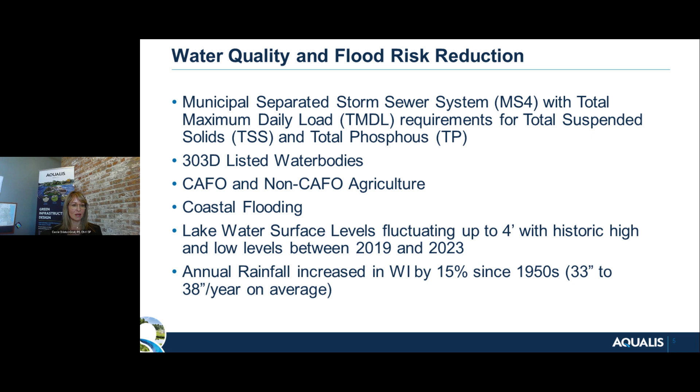And then also annual rainfall increasing in Wisconsin, as it is in various places throughout this country and the world, really changing, pointing fingers at climate change or at just changing weather patterns, somewhere between 33 to now 38 inches per year on average. So a lot of communities are saying, maybe we should think about green infrastructure.

We heard today from Lisa Haney starting off, and how we did a really good job thinking about point sources for sanitary outfalls and for point sources that were coming right off of industry in the old days, and where stormwater is now the #1 reason for pollution in our water bodies. We need to do more with source control, and that's really what green infrastructure is. We describe that as managing water where it falls. Grab it as close to the source and do something that holds it, allows infiltration, allows settling of pollutants, and maybe it's going to be a temporary holding place until that storm has passed, but it's a way to consider multiple areas of storage throughout your watershed.

We also heard quite a lot from Matt Prusko, and I really appreciated all of his design insights. We've seen so many of the same things. We've been designing green infrastructure for about 20 years, and in Wisconsin, and you can hear my accent, you'd think, northern climate and frozen conditions and those things all don't seem to be really great matches with green infrastructure, but we've worked through all that, and we've got a lot of very similar lessons that we've learned from that.

But he talked about managing a lot of smaller storms, because it's the most often storms you're going to be seeing, so the 1 to 2 inch storms, or even less than 1 inch storms. And I want to address that a little bit too, and some of the things that we've talked about with this project and where we maybe changed that just a bit. He added some awesome examples of bringing agencies together and various communities and groups and people to have great things happen within your watershed. And I think all of that is key.

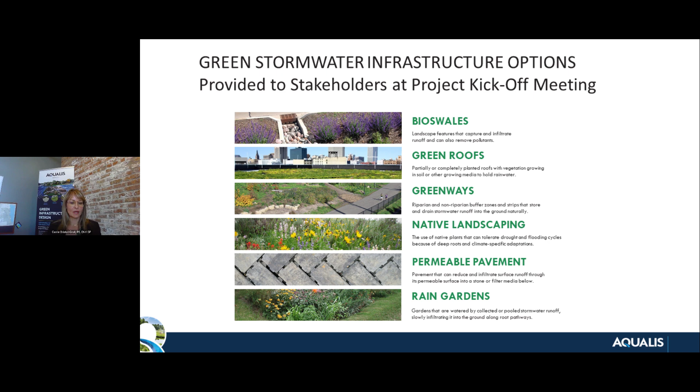And what they came up with was this list on this page here: bioswales or bioretention, green roofs, greenways, which is tying together a variety of green aspects, maybe within a corridor of a park, native landscaping, permeable pavement, rain gardens, rainwater catchment, which would be rain barrel, cistern, storm garden, anything that catches and holds. Underground storage, even, they consider to be green infrastructure. That's something that can be controversial.

If it is a big structure that goes underground, it doesn't necessarily look green, but why they consider it to be green infrastructure is because, again, it holds storage close to the source. It manages water in small catchments throughout your watershed and allows for settling of pollutants and also not flooding, potentially not overwhelming a sanitary system if there were possibility of inflow and infiltration happening. We also included removal of pavement and structures as a green infrastructure practice.

You don't get as much credit or as many gallons of storage out of this activity, but if you have giant parking lots for big malls that maybe are not being utilized very often, removing that pavement, removing an old building from the back 40 of a school property or something is also considered green infrastructure in this community.

Adding soil amendments. We've heard a lot lately about urban soil health, about soil amendments being added and different treatments to be utilized with urban soils. So soil amendments is a very important part of that. These are alphabetically listed, not in order of importance. So, trees also, any type of tree can be added and has some various types of contributions to water quality and all the other co-benefits for air quality and habitat and all these things.

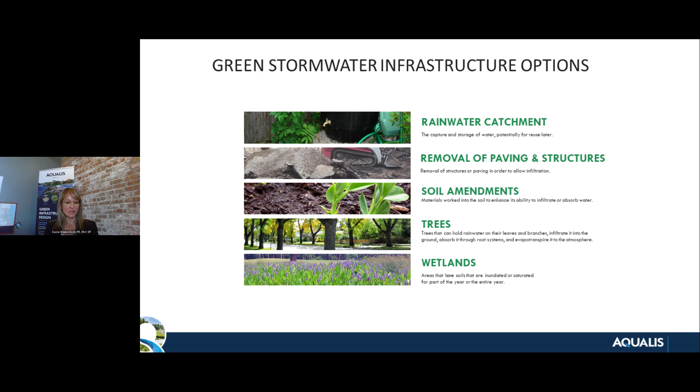So next part of our workshop, and we started with a few surveys to all of those participants, is to get a feel for where they are in terms of if you are going to do green stormwater infrastructure or green infrastructure, where do you want to place it? And then what is the need for having it? So it was two different surveys. One is about what is the need for it, and the other is where would you place it?

And so when we go through the conversation at our workshop, we talk about, do you want to have green infrastructure only at an outfall of a storm sewer? It's probably not effective there, but some people thought in the beginning, and that's the part that really varied the most with the survey, a lot of people thought, oh, sure, the water comes down the pipe or down the street, we're going to throw it into porous pavement or a bioswale, and then it will just discharge out to the waterway. And they found out through our conversation that really is not that effective and may be okay for the water body itself, but it doesn't meet a bunch of our other objectives that we'll get to in a minute here.

Where do we also want to think about placing it, near schools where there's an educational opportunity, only in public rights of way, only on parks and playgrounds? So a variety of locations for where you would want to place it, but then where is the need? And as we had our conversation, it became clear that the highest needs are where there is flood potential or ponding in a roadway. Usually we're not going to be looking at managing coastal flooding. That's just too big a beast with too many potentials for not really managing that well.

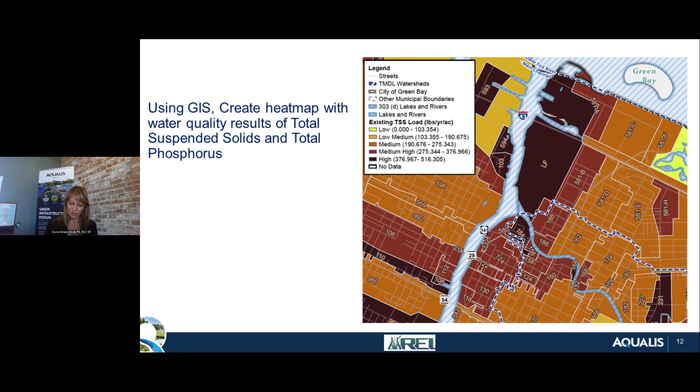Sometimes those evaluations have been done already as a part of your MS4 permit, and sometimes they're not. So on occasion, then we'll have to do all the calculating to come up with that water quality. Those are mapped. Next, we do take that same map and then we lay those neighborhoods over. So each neighborhood is delineated and it's got an identifier.

And the city was curious if they did have that revolving loan fund going out to the community for a rain garden in a residential property, we want to give them a little extra bonus points to their application if they happen to be located in a neighborhood that has poor water quality or that has maybe reduced property values. We also looked at that in the community, hoping we could improve property value by way of more green in that community. So to be able to map where they are, we wanted to have the neighborhood shown.

And then historic ponding, I'm going to say more so than flooding. We're not looking at coastal flooding. We're not looking at FIS maps. We're looking at areas within the system where it's usually a low point mid-block or a storm sewer's undersized. You know, storm sewers are only designed for maybe a 10-year storm 50 years ago. Now that 10-year storm is more like the 5 to 7-year storm today. And so occasionally you're going to see ponding, flooding, water overtopping the roadway into private property.

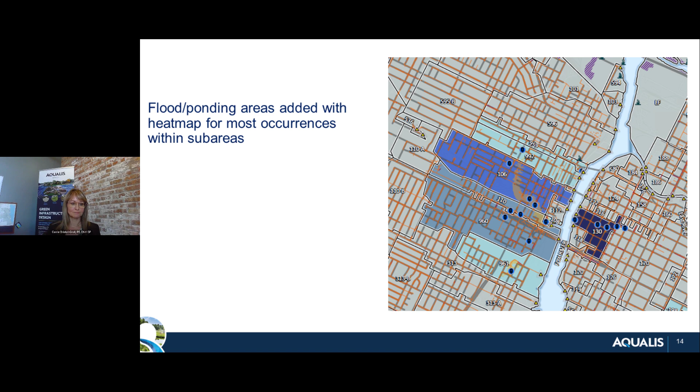And wherever that happens, they usually get a phone call during a rain event to the police or fire department, and they map these. So they've kept track of all those phone calls they've received. We mapped those and we said, in the areas where the blue dots are, is where you're usually getting the phone calls, which sub-watersheds are those in? Then we're able to lay those into the map as well. So you see where I'm going. We're mapping, we're mapping, we're mapping. We bring all those maps together and it's kind of like making a batch of cookies to see what are we going to get out of it.

We're also looking at the city's capital improvement program. So what are the projects that they are going to have on their books for the next 5 years? I think it was a 5-year plan. And let's lay them out. So every location where you see a yellow dot, it's a programmed project. And we're mostly looking at something like a water main, a sewer project, a roadway replacement, something that's definitely in the roadway right of way.

I don't believe I have a map on this last bit here, but then we're going to look at constraints. So, well, a positive opportunity or constraint. So an opportunity would be parcels that are in lower than average property value neighborhoods. These are areas that have declined. Maybe they have some amount of vacancies in properties or abandoned buildings that need to be renovated or that need some kind of facelift. We want to try to bring any public dollars we can to bring more life back into these neighborhoods. So we have those mapped.

Anything that we have as proposed development areas, we know there's a lot of old infrastructure in Green Bay. It's a very old city. And so there's some old industry buildings or old commercial buildings that have been sitting vacant that are getting fresh and ready for some kind of renovation. Those are mapped as well.

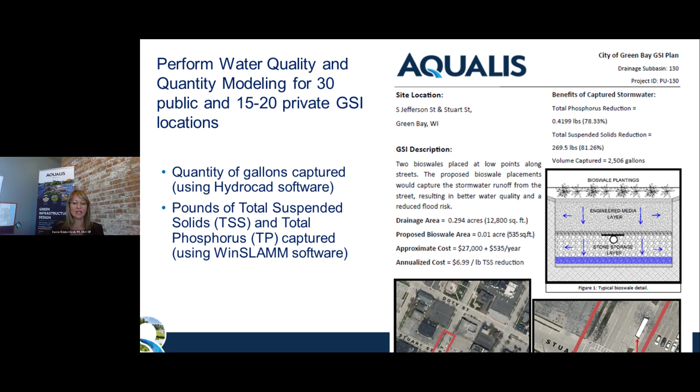So we're going to talk about how many gallons can we capture at each of these sites, phosphorus and total suspended solids removed. Let's come up with a cost estimate based on current construction prices, which really has changed over the last few years. What construction prices are we seeing, and trying to estimate what that construction budget should be. And then as well as an anticipated maintenance cost for that GI device. So all of that is determined on each site. We produced a couple sheets like this on each project.

And then we really drilled down. So this is still concept level. We only know utilities based upon aerial photos or some of the city's GIS information. So we're not doing a really deep dive of potholing for utilities or ground penetrating radar or anything like that. But we are looking at where do we see water main. Wisconsin State Code used to require 8-foot separation horizontally from water main. We were really active in getting them to change that code down to at least 3 feet so that we can have a little bit of room in there. But where do we see other utilities? Where's their lighting and all these things? So you can see quite a lot just using a GIS.

Then we determined the size that it should be for the area of capture and came up with a cost estimate. And when I mentioned sizing it for a 1-inch, a 2-inch storm, a 1-year storm event, maybe, we actually looked at where we have problems with ponding or flooding or structure flooding within the upper half or third of a sub-watershed. We want to try to make that as large as we possibly can to actually give us a little bit of flood storage as well. We're already in the ground. We're already excavating. If we can get a little more width or a little more depth in our underground storage section, the opportunity is there and the cost is not that much greater to make that volume much larger and help to offset that flooding.

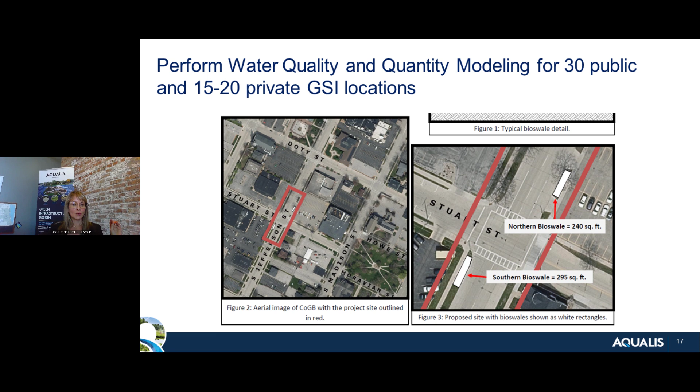So that's where we maybe vary a little bit in thinking about green infrastructure as not just a water quality device, but also managing a little bit of those flood flows, kind of going back to what Lisa said, and managing point sources and managing water where it falls.

And then we pull all that together into a GIS map. So anyone at the city or the public who has access to this map is able to drill down and find out where we're proposing the various types of GI and then see the details from all the sheets that I showed previously of location, cost, gallons stored, water quality, total solids removed, and all that goes into the GIS, as well as what is the anticipated future maintenance? What does that schedule look like? How often does somebody need to be out there looking at it after it's built? And then a place for the city to plan on inserting all that information later.

So I worked previously at 2 cities for the first 12 years of my career, way back 30 years ago when stormwater management was really just a new thing in most cities. And to keep a record of where all these things are being installed and who has a maintenance agreement and who's abiding by it and who's been doing a recertification or not, there's just a ton of information for staff to watch over. To turn back the times and have hindsight be 20/20, one location to store all that data and to see when something needs maintenance, that you have it on a schedule and that photos can be inserted right into the GIS of the last inspection, the last maintenance, the last whatever was done, really gives them an upper hand in moving forward.

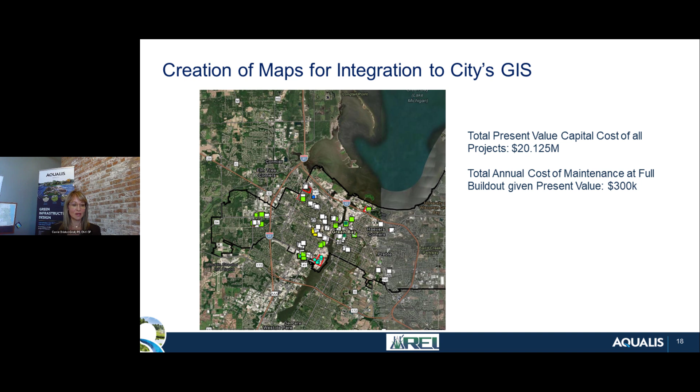Just get a handle on it right up front to be able to have one person take a look at it and manage it and not a whole staff. I think at one municipality I worked for, we had about 10 municipal engineers all working on stormwater. And that's a ton of money over many years that maybe could have been reduced right away.

So drilling in on that GIS a little, and we didn't have this interactive for today because of the issues of bouncing out into an interactive screen and back and forth. So I'm just doing a few screenshots, but I did zoom into one of these neighborhoods. And we can see the details. If you clicked on one of those white squares, you would see that these are bioswales

and that they're in the city's right-of-way. There is a drainage area collected of 171,850 square feet. And on my screen, this is really tiny. So I hope if you're interested, you get a copy of the PowerPoint, the PDF that we provide for you, and then you can look a little closer.

But we're also saying, what is the number of pounds of total phosphorus reduced every single year? 1.6 pounds every year. Total suspended solids, 643 pounds every year. That's a few large people worth of solids going into these bioswales, keeping it out of the rivers, out of the substrate of those streams where we're hoping that fish are spawning and all that, instead of being caught into the bioswale. That tells you we're going to have some maintenance of the bioswale as well.

But the fact that we're capturing it, going back to a previous presenter talking about trash in the bioswales, I'm hoping that it's going there because otherwise it's going in the water body. So when I see a bunch of trash and things in the bioswale, I'm like, it's doing its job. That's what it should be doing.

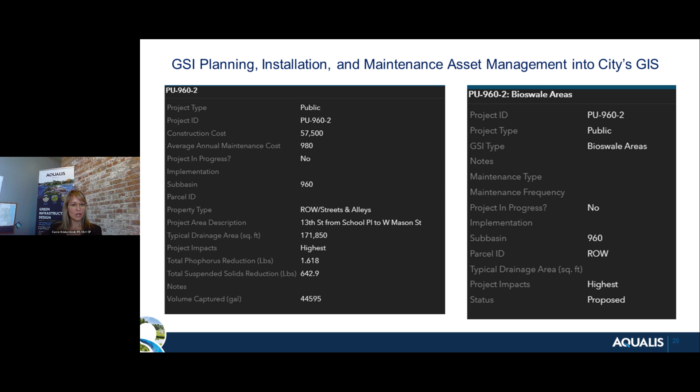So back to this GIS, we also see things that you can see on the right part of the screen that have no information. The maintenance type, the frequency, when the project gets implemented. It currently is not in progress because this is not a part of the CIP for maybe a couple of years. So all that information can be kept right here. And then we'll link this to a few slides down from now. We'll talk about maintenance and how we put that information in.

I wish I could ask if anybody had questions, but we'll keep going.

So triple bottom line, everyone wants to know what are we getting out of this? And you might have seen a slide a few slides back about what was the construction budget, what was the construction value in current present value terms to install these 50 GI devices across the city. And it was actually $20 million in today's current value. So $20 million spent on all of these things. What are we getting for our dollar?

And typically you hear people say, it's a lot of fluff. It's a lot of not very concrete, evidential benefit that you're getting out. Thankfully, the folks at the Water Research Foundation created this very deep spreadsheet tool that gets into 12 or 13 different aspects of the benefits you take out of green infrastructure. This takes a lot of time for someone on your staff to go through and enter very local specific data of things like cost information on installations, costs of your water per gallon of use, power, various things that are very local.

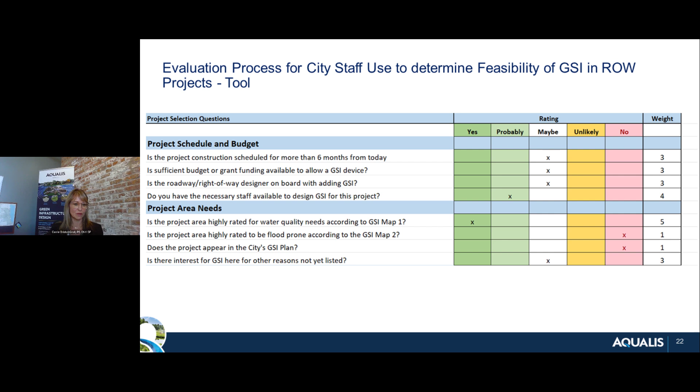And then at the end of this, we give you a little score. And we say, if your score is over 70%, you have a good likelihood of success for this project. If you're between 60 and 70, maybe you need a little extra effort. Maybe you need a champion in the office who is going to push this forward. If you're over 70%, you're probably in a good spot.

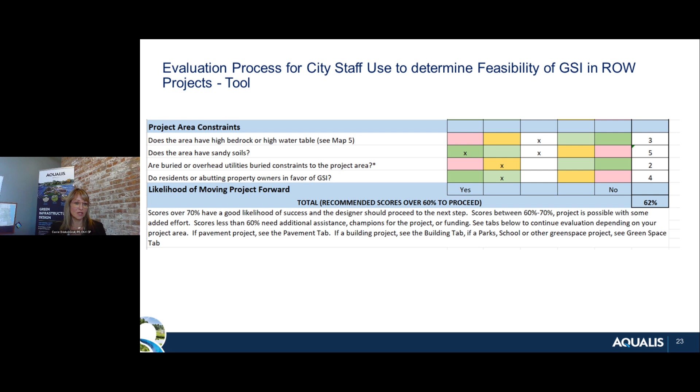And this, again, is for evaluating projects that are not the ones that we've already prescribed, but next year a new roadway gets put on the CIP and they want to take a look at whether or not there's a good place. One of the questions is also, does it fall within areas that are constraints like high bedrock or high groundwater? Or does it also fall within one of the areas of poor water quality or continuous flooding?

So then we give them a pretty simple little example of, if they're going to do green infrastructure, what is the surface area that they're working with? Is it roadway? Is it a parking area? Is it a park, a school? Is it a roof, a building? And then what types of GSI or GI are appropriate for that type of use? It's pretty simple, but it helps them just kind of drill in, like, now I know about the few things I'm going to try to think about here.

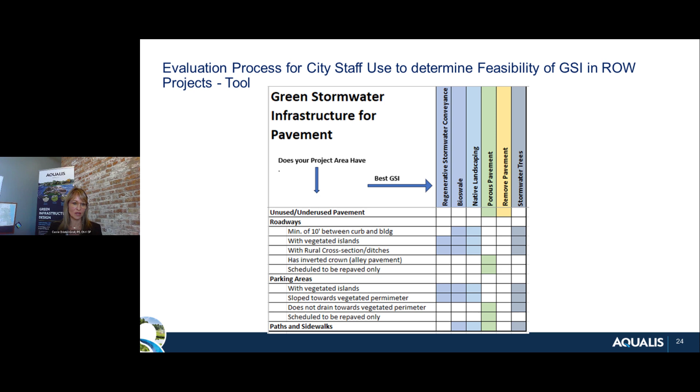And then the feasibility tool we talked about already also has a process. Again, it's very straightforward, but to give them a checklist of what are the concept plan, preliminary design, final design, and then construction things to be considering, as well as post-construction maintenance. Maybe they received a grant and they want to be able to report to that grantor, just making sure that they're checking all the boxes.

So now we've given them the way to evaluate, the way to consider what type of GSI, a process for going through, allowing for review, interdepartmental conversations. If you are hiring a consultant, this can just be a guide for you to say, how do I hire someone? What should I have them follow? If I'm going to write an RFP, request for proposal, because I want to hire a consultant, these are some of the tips of what do you want to ask for.

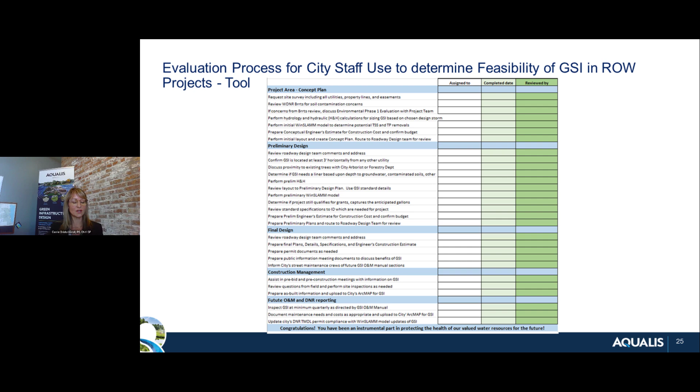And then we want to help them be able to actually design it. And if you're starting from scratch and you have no idea what the cross section, it's very engineerish here, but what's the cross section of a bioswale? What does that look like? How deep should each section be? What are some specs that go along with that? And then a written specification for the construction packet.

So these documents actually were produced in part by us and other partners for one of our clients who is an amazing champion of green infrastructure, and that's Milwaukee Metropolitan Sewerage District. They have offered a lot of these things for free for anyone to use on their website. And we also got permission to modify them to fit the City of Green Bay's specific needs. So some of these details are available. They were in a MicroStation file. We converted them all to Civil 3D and then got them kind of specially honed for Green Bay's use.

So it's not, I like to say we're going to be building on the shoulders of giants. It's not reinventing every single time, but learn what's out there, grab up whatever someone else has decided is the best way of doing things, and then build from that point forward so that we're not always spending the same dollars. This was a grant-funded project. It's coming from public dollars. We don't want to waste that valuable resource.

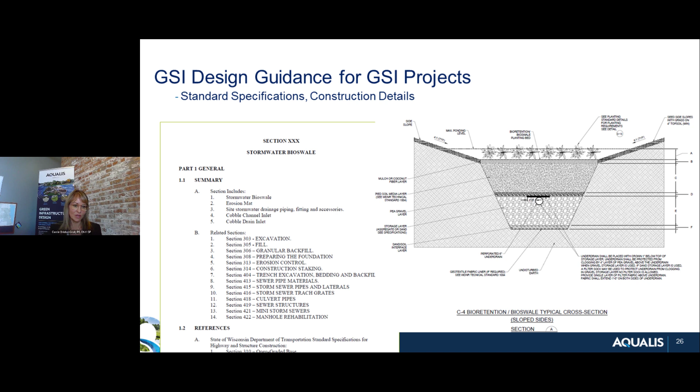Kind of lastly is wrapping these things up. So we don't want to have a document that is like this thick and you're having to page through page after page, and nobody wants to read that. We wanted to have as few real chatty bits of a report and really more about the documents they can get using and move forward with right away. So the actual report is more about attachments of many maps that became part of their online GIS platform. And then those 50 project locations, very easy to take one out of a plan set and say, okay, we're going to march forward with this.

And then the really important other piece to that is an operation and maintenance or inspection and maintenance plan. So again, we had another previous project where we put this all together with advice and input from landscapers, landscape architects, designers, contractors all over the country. We had folks from the East and West Coast helping us develop this plan to get a good idea of what's best practices, no matter where you are in the US or elsewhere. And this, again, was done for Milwaukee Metropolitan Sewerage District. And they're very generous in saying it was public dollars funded. Let's get it back out into the public and share it as much as we can.

So we took that same plan that we developed anyway, and we modified it to fit the City of Green Bay. They had a lot of comments. They wanted to move things around, change out the invasive species list, put in preferred vegetation for native landscaping, a lot of that. So those two plans were prepared. The operations and maintenance plan gives them step-by-step information on each one of the GSI practices that they said they agree with right in the beginning, couple slides.

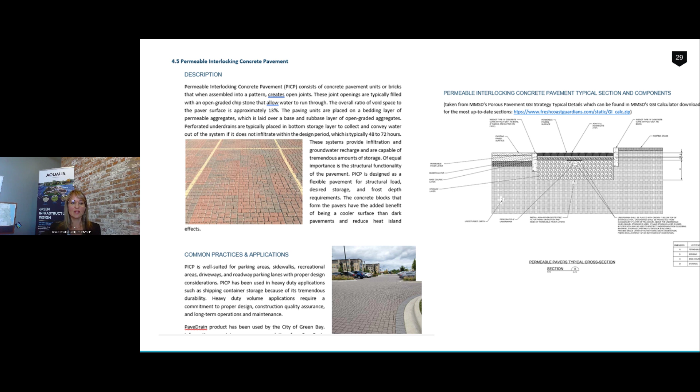There shouldn't be clogging happening very often if you're maintaining the surface, because with what gets down into the base, you do the calculations on how many solids are actually deposited there over the course of time. And it takes 30, 40, 50 years to start filling up the base of your subsurface area if you're designing it properly. And then what does the maintenance look like? You inspect it every 6 months, you vacuum clean it maybe every 6 months, maybe every year, depends on what's running into that area. So giving them all of those details, again, starting on that shoulder of giants, I'm not going to reinvent any of that, but just package it in a way that people can understand.

And then even kind of a marching order of how often do you want to be doing if there's signage, if there's graffiti, if there's trash, how often do you get out there? What's the maintenance indicator when something isn't functioning right? How do you know? Well, if it's trash, you see there's trash. But if it's clogging, you might see standing water on the pavement. So describing what they should see if things are not functioning right, and then what the maintenance is that's required. We describe the maintenance even, what all of those different things mean. And it gives them all the tools.

So yes, somebody's going to have to do a little reading in advance, but each of these sections is 5 pages maybe on each type of device that can be pulled out of a binder or a PDF and be able to share with the staff.

All of the information then about what maintenance is required for each type of device goes back into that GIS. So the GIS says, on March 1st and September 1st, you need to inspect. You need to remove trash or whatever the items are that are listed out on here goes into the GIS for someone to produce a report every few months and hand out to the maintenance staff, whether that's done with your own existing folks, or if you're going to be putting that out to a public bid or whatever. At least you have the information and a tool that will help you generate when do these things have to be done.

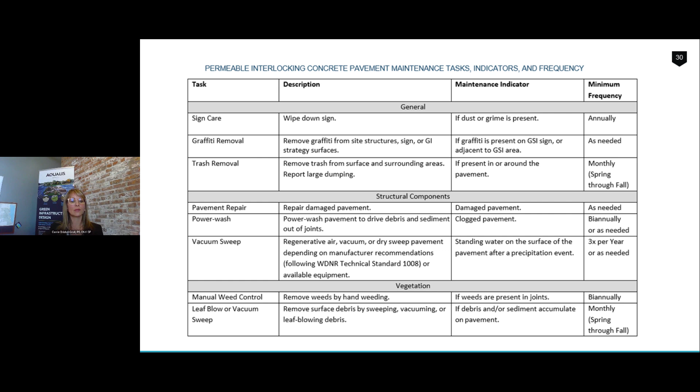And really lastly, in our process for this particular project, was to take it to a number of the environmental section of a committee, a couple different committees, a public works committee, a parks committee, and then finally to their common council. And there was a lot of conversation. It did not feel like they were going to approve it right off the bat because people were still going like, that's a lot of money. How do we know there's going to be benefit? We went through a similar presentation to them. They were pretty sold by that triple bottom line analysis.

And also somebody from the public happened to show up at that meeting that was fully on board and really supported it and said all of the great benefits that she's gotten out of just native landscaping her yard. And so if you can have a public advocate come to a council meeting, that really does a lot of work to help them approve it. But they approved it unanimously. They gave us a lot of compliments on having a lot of thorough information provided to them.

We did a training session for the design process that we talked about for their engineers, construction managers, et cetera. And now the projects are going out into the CIP schedule and getting into the design process. The really good thing that comes from having a plan like this is grantors like to see that you have thought through a process, that you have a schedule, and that you really have a reason for placing GI in the places that you have.